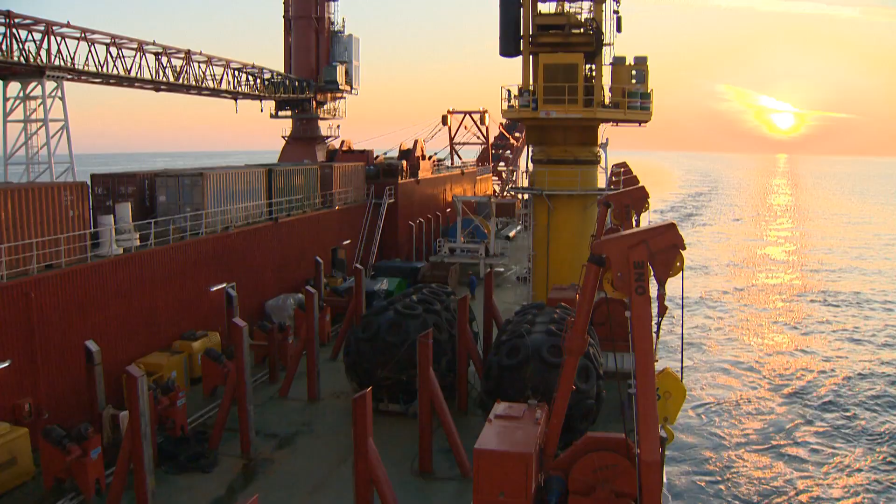The Dzhubga, Lazarevskoye and Sochi gas pipeline is part of an intensive development program for all the Russian resorts on the Caucasian Black Sea region, and is included in the program approved by the government of the Russian Federation for construction of the Olympic facilities and the development of the mountain resort of Sochi. The Russian company Gazprom is the beneficiary of the gas transportation pipeline.

This is a project that consists of 150 kilometers of pipeline, and it goes from a town called Dzhubga down to Tuapse, and from Tuapse down to Kudepsta, which is close to Sochi, where the Olympic Games will be held in the year 2014. One of the most important things for this gas pipeline is the distribution of the gas, so the infrastructure in the country can be improved and they can prepare for the Olympic Games.

With a total length of 177 kilometres, out of which an offshore section of 159.5 kilometres, the DLS gas pipeline is installed on the seabed, along the shoreline at a distance of approximately 4.5 kilometres, having its final point of termination at the gas distribution facility in Kudepsta, in the vicinity of Sochi. GSP is the only Romanian company to win a project of such a scale in the Russian Federation. The initial value of the contract amounted to $269 million.

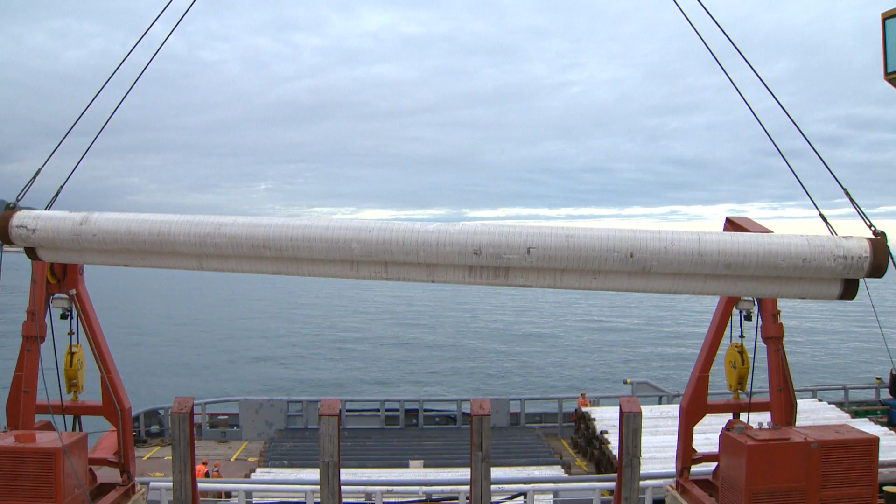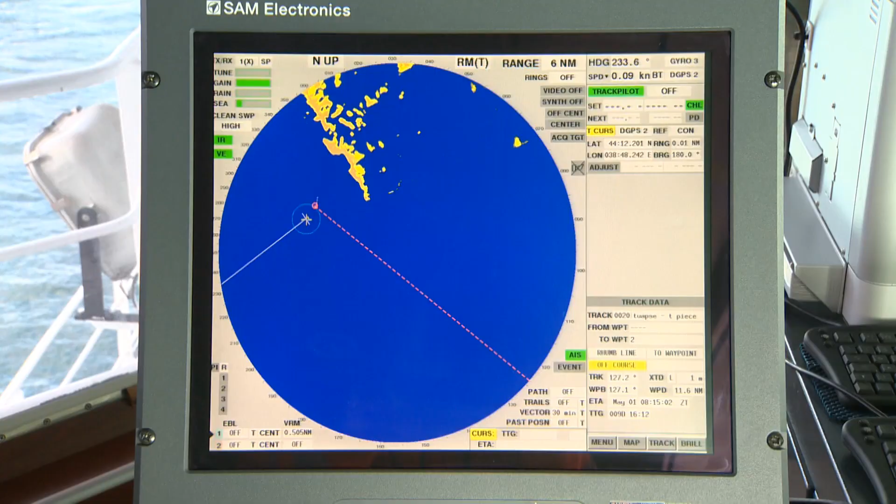The 530mm gas pipeline will have an annual flow capacity of 3.8 billion cubic metres. The offshore natural gas pipeline project was designed in such a way that it should be as distant from the coastline as possible, in order to guarantee the substantial mitigation of the environmental impact on the Black Sea coast ecosystem.

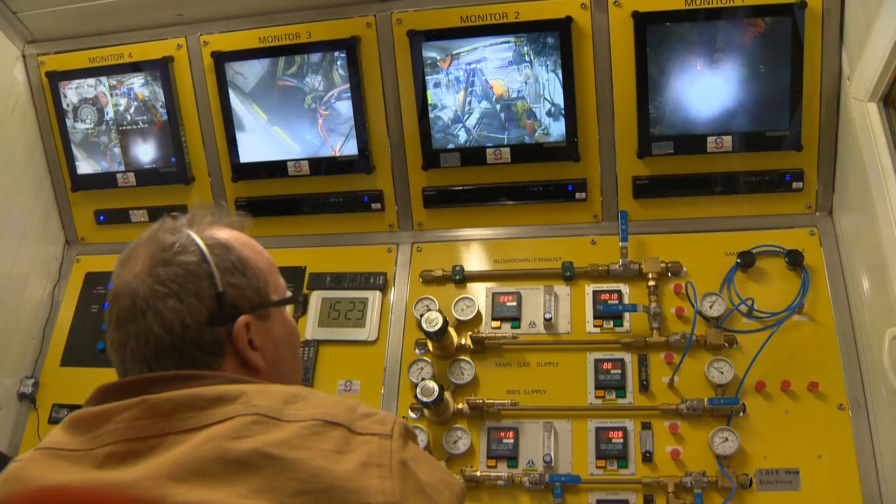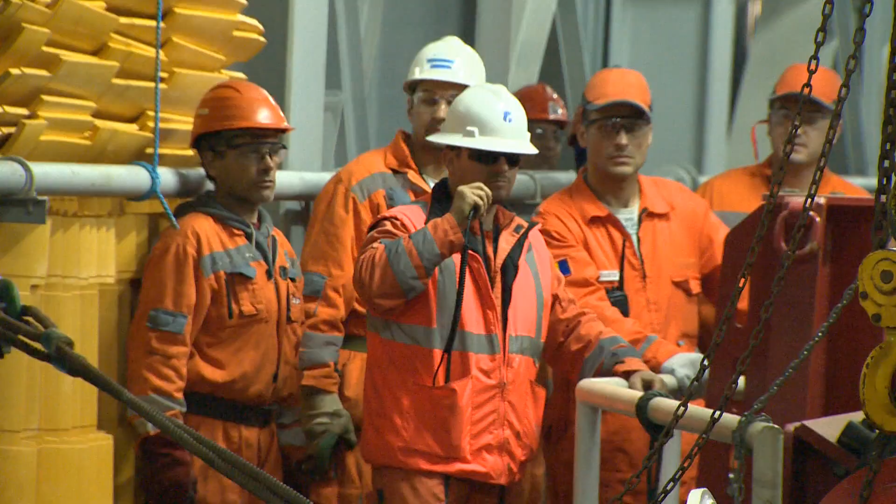DLS is a multicultural project comprising people of various religions and ethnic groups, as well as an extensive professional range, from fitters and welders to NDT technicians, ROV operators, divers and diving support operators, marine crews, designers of pipelines, oil and gas installation and commissioning engineers. A great variety altogether. A great number of nationalities have come together in this project to bring their engineering expertise. Romanians, Russians, Dutch, British, Thais, Malaysians, Italians, Spanish and many more.

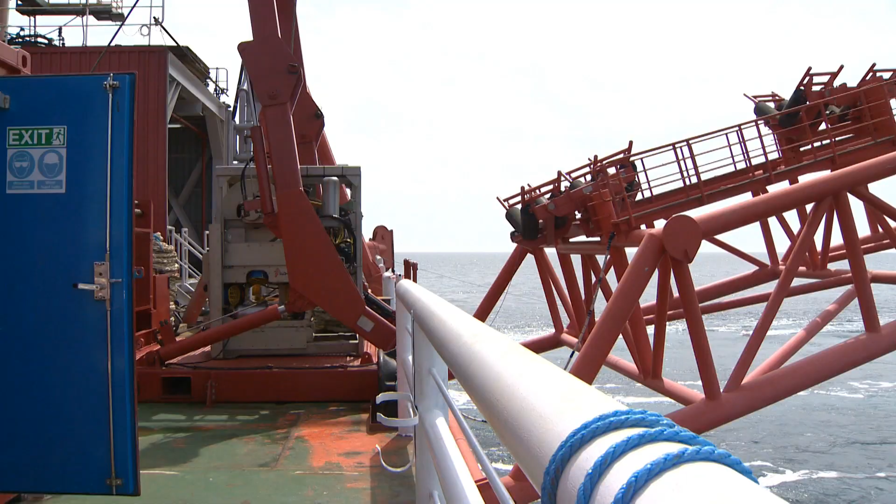The construction of offshore projects was under GSP's coordination. GSP carried out the main offshore works in approximately 100 days between March and July 2010. GSP has experience of large-scale projects and projects of outstanding importance. DLS wasn't in any way a simple project. I consider that this company is a leader in this part of Europe, especially in the Black Sea, regarding the drilling industry and the pipeline. Our job, the Bigfoot One job, is to lay pipe in Sochi.

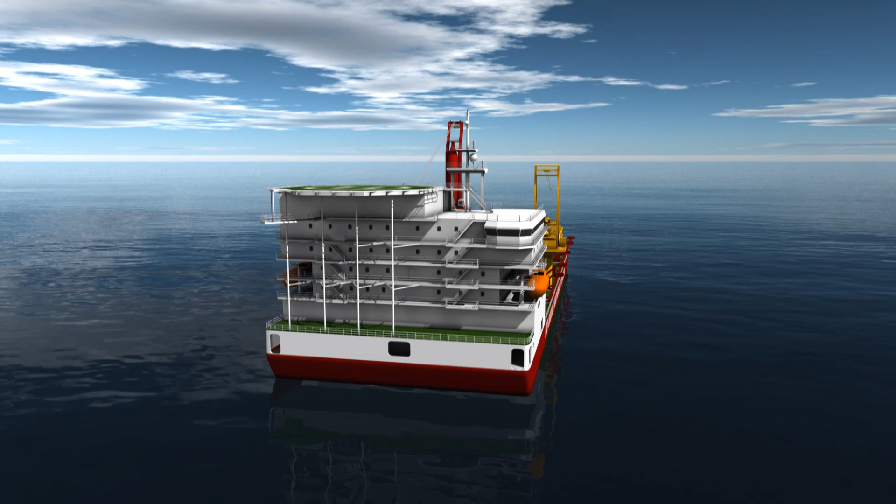The last 5% of the project works were completed in May 2011. Once the connection of the offshore and onshore sections of the DLS pipelines were completed, GSP Bigfoot One performed the final midline tie-in, welding together two sections of pipeline near the Kudepsta settlement. Previously, similar works were performed near Tuapse, Dzhubga and Novomikhailovsky.

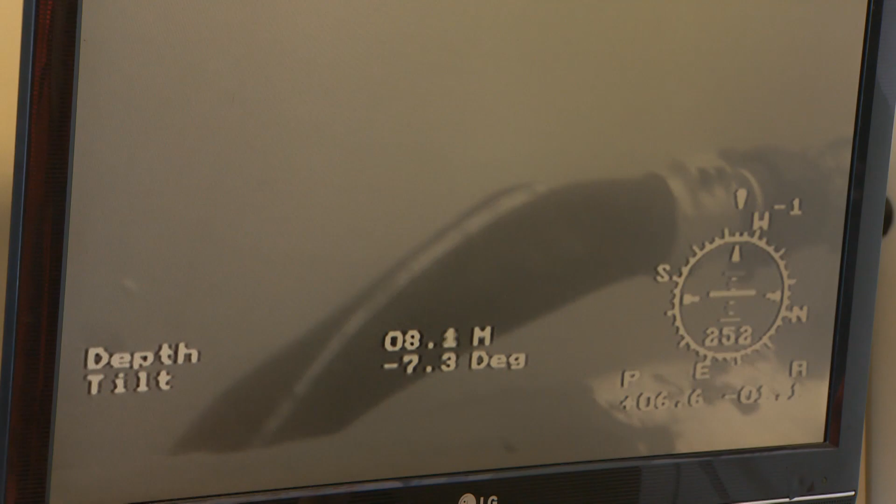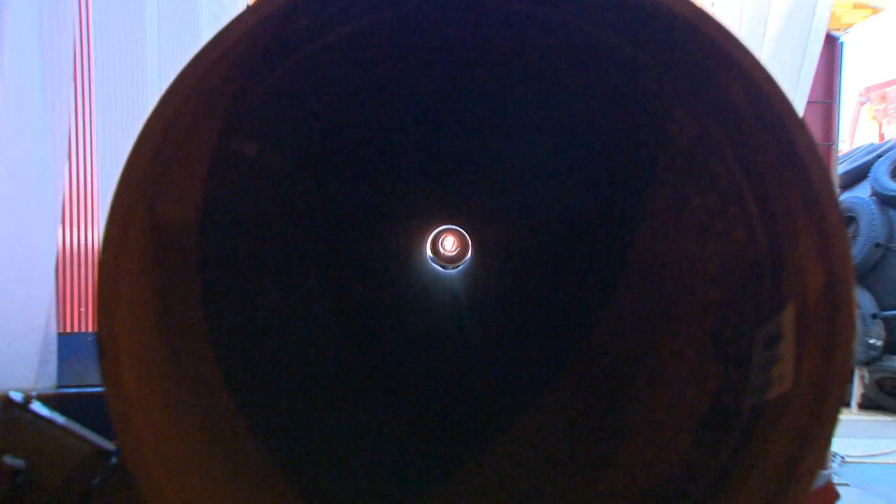The onshore-offshore connection of the DLS pipeline, Southern Loop, was then followed by pressure testing, dewatering and drying. The testing and drying of the Northern Loop in the Dzhubga-Tuapse section had already been completed. You may become aware of the dimensions of the DLS project once you learn about the offshore section, which weighs 84,000 tonnes.

GSP's offshore technological camp was quite something. An extensive international fleet mobilised offshore of the Caucasian shore at about 4.5 kilometres. Two pipeline barges, GSP Bigfoot One, built in 2010 in GSP Shipyard, and Seamaster. GSP Prince, the most modern OSCV and DSV ROV in the Black Sea, built in 2009 in Norway. GSP Phoenix, PSV, intended for manpower and materials delivery.

GSP Vega and GSP Queen, the anchor handling tugs. A 12-man, 300 metres of saltwater saturation diving system. A fleet of ROVs for pipeline route surveys, as-laid surveys, monitoring of trenching and divers operation and subsea installation works.

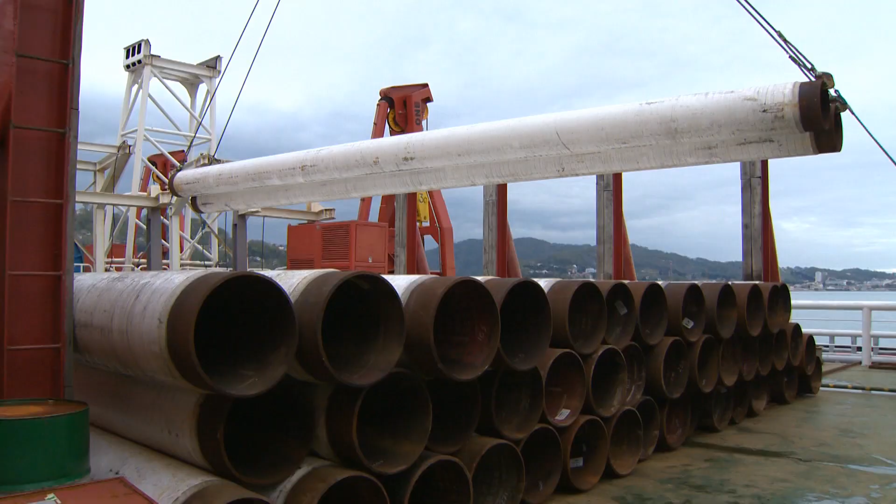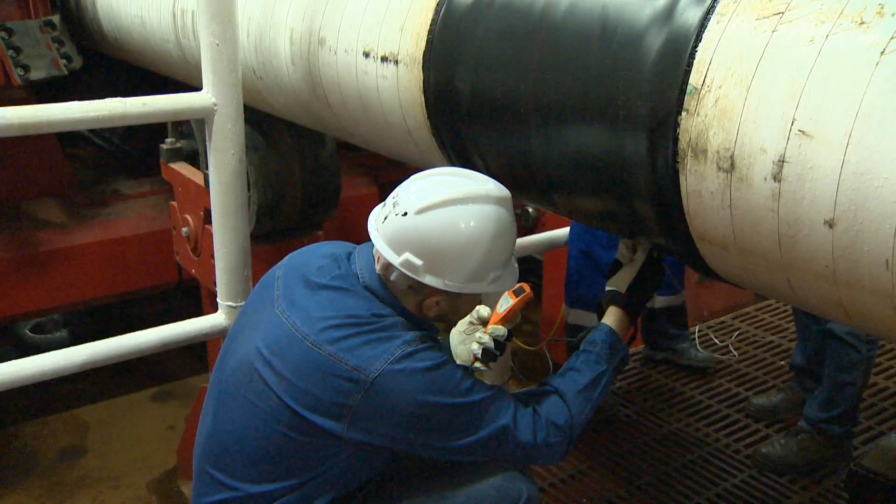The gas pipeline fabrication process consists of several stages. The pipe laying barges ensure the entire pipeline fabrication and technological processes. Beveling, automated welding, non-destructive testing, coating testing, and finally the pipeline launching out of the stinger to the bottom of the sea. The pipes are transferred from the storage area with the help of a special pipe conveyor system, beveled and immediately after that automatically welded.

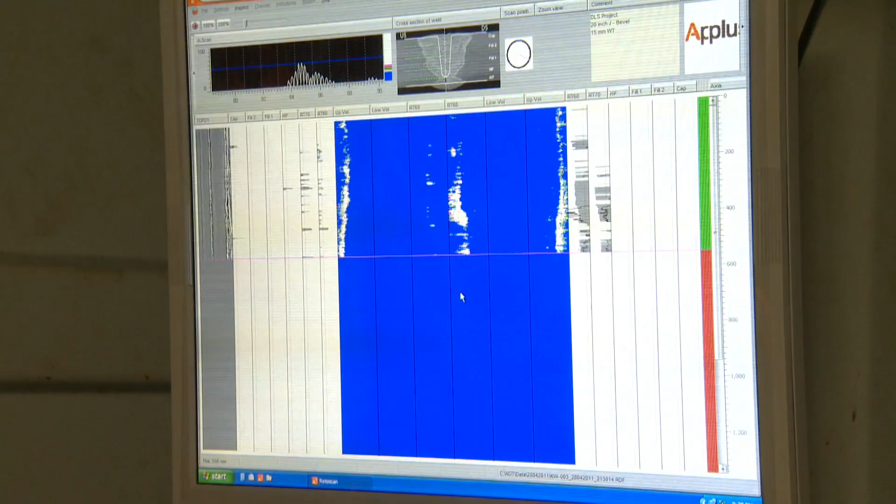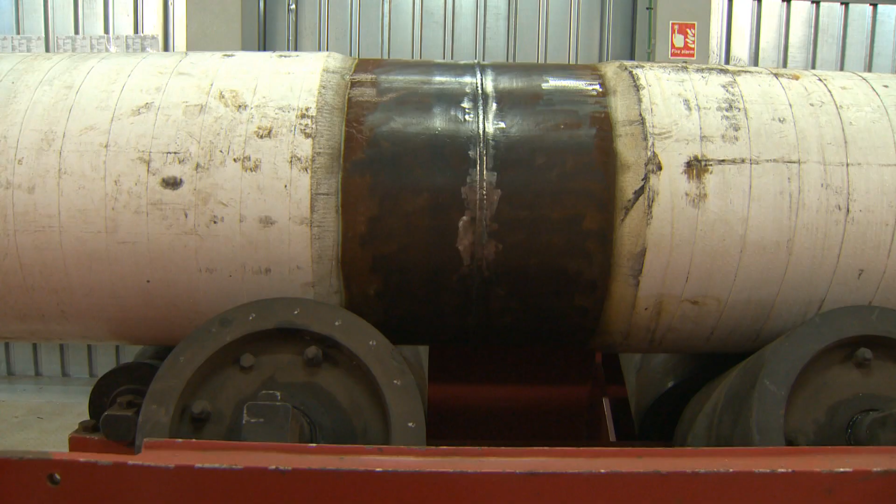Once examined for flaws or defects at the NDT station, a welded joint is treated in a special way to ensure protection from leaks or mechanical damages. All these operations are performed on the firing line. After that, the pipe is launched onto the seabed using the stinger.

The entire process lasts approximately 8.5 minutes. Thus, every 8.5 minutes, the gas pipeline gets 12.2 metres longer. While the vessel moves at exactly the same speed, it is almost impossible to notice the vessel movement. The pipeline grows slowly, with approximately 2 kilometres per day.

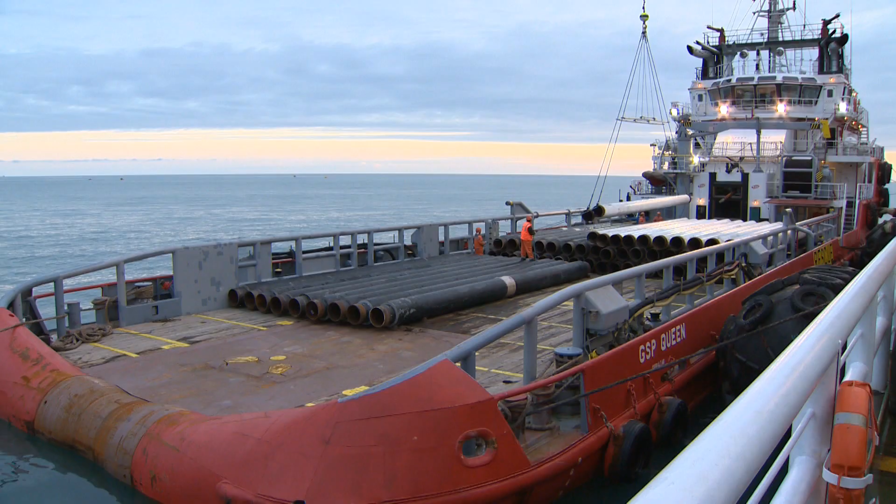Taking into consideration the offshore mobilisation works, words like slowly have a new meaning. Technologically speaking, a 2-kilometre pipeline installed daily in normal weather conditions is quite something. The onboard pipe supply for the firing line fabrication process is stored on the main deck, neatly stacked in lines occupying up to dozens of square metres.

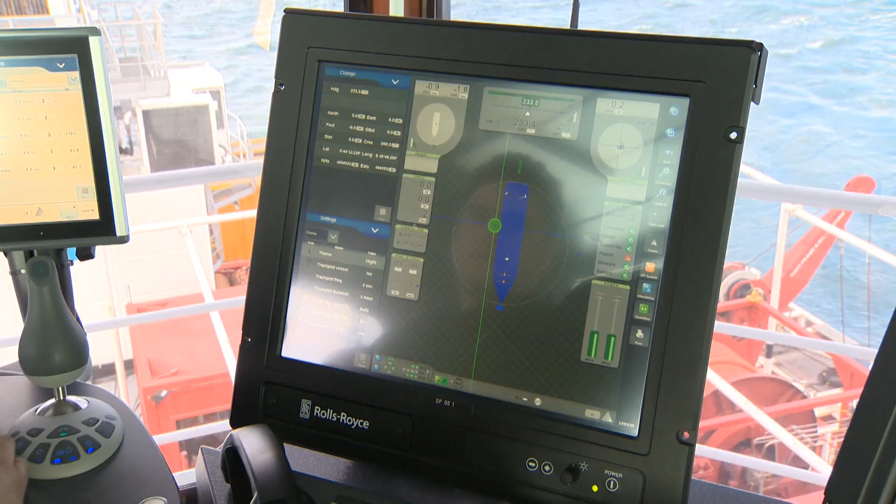GSP Prince looks impressive, and we can assure you it is. It is the most modern OSCV, DSV and ROV from the Black Sea. It was built in 2009 in Norway. The vessel can operate in extreme weather conditions.

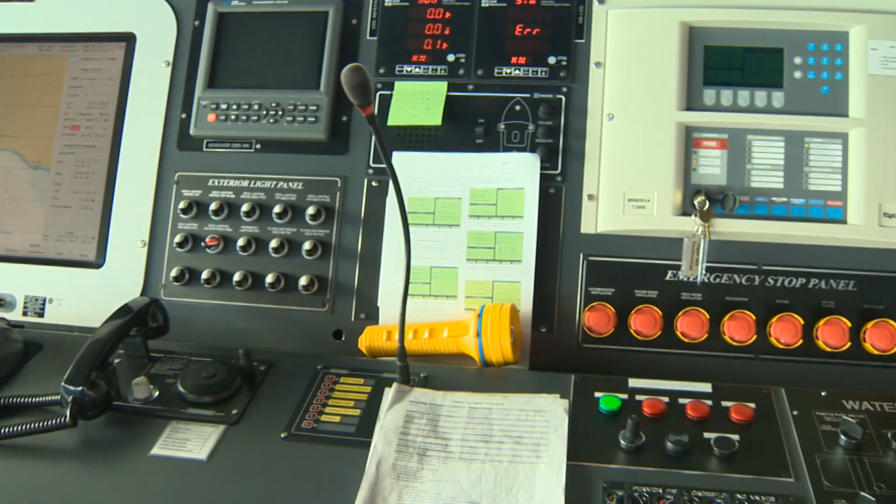It can perform tasks such as underwater inspection of cables, routes and pipelines with ROVs, seabed mapping, subsea installation works, diving operation support, geotechnical studies and manned and unmanned subsea vehicles, support surveys, inspections and investigations. GSP Prince was the main ROV and DSV support vessel in this project.

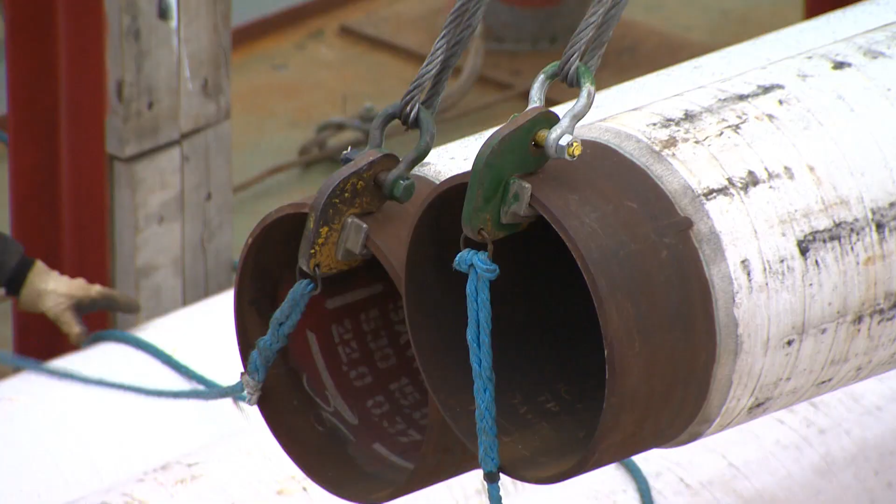In order to lay down pipes, you need a pipe supply, and the pipes are stacked on the deck. The standard dimension of the pipe is 12.2 metres, and at this diameter they weigh 6.4 tonnes each, including the cement coating which ensures the negative buoyancy of the pipeline.

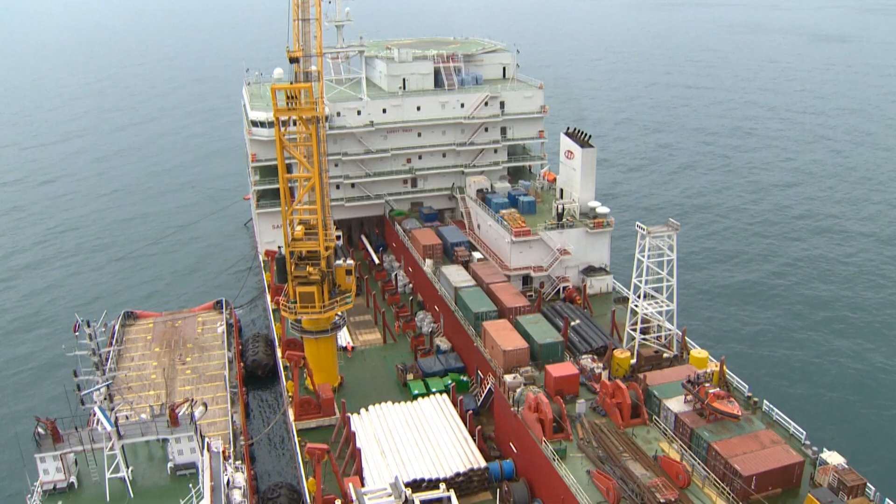All the pipes are manufactured at the Vyksa Steel Works and coated with concrete at the Moscow Experimental Pipe Procurement Plant. They are brought onto deck and stacked in zero bay by the joint handling NOV crane. The pipe joints are stacked in special racks and the same crane moves them onto the production line.

The first operation is a quality inspection. The purpose of this operation is to inspect the entire surface of the 12.2 metre long pipe in order to discover any fabrication flaws or deformities caused by handling.

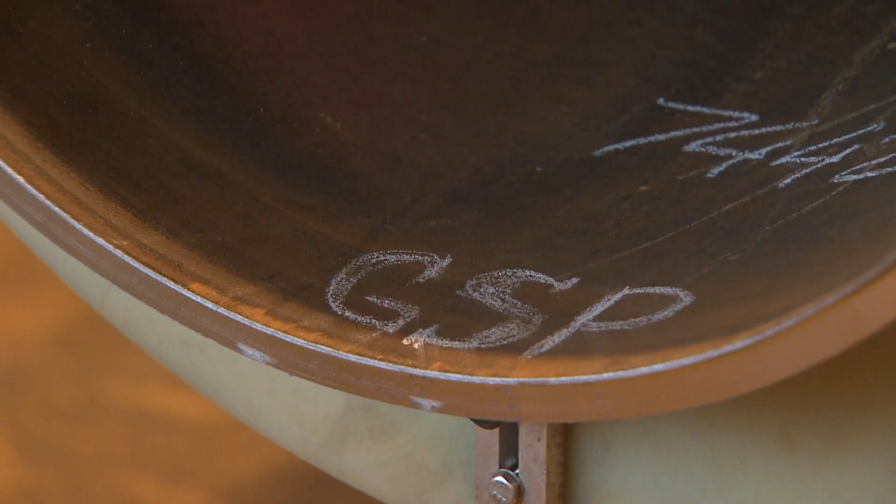Despite the impressive size of the pieces, small irregularities may look unimportant, but due to the harsh environmental conditions at the bottom of the sea, any small problem may evolve in time, generating complications. This is why, at the QC station, the inspection is done thoroughly.

Pipelines are aligned and directed to the preparative workstation 1 for the J-type bevelling operation. Here the bevelling is performed with 2 hydraulic cutters simultaneously operating upon both free ends of the pipe. The picture is pretty simple here. The equipment you see is exactly what is needed in order to lay down the pipes.

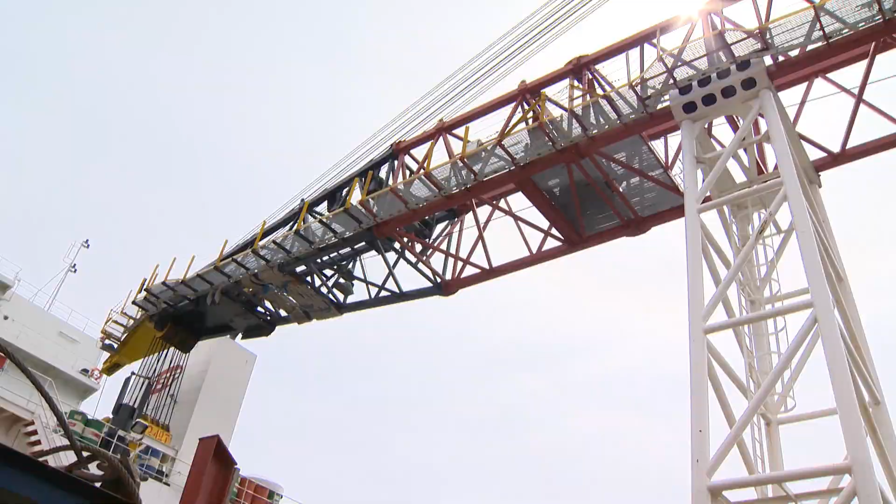A heavy lift crane, a Liebherr 318-ton lifting capacity, an NOV pipe handling crane, conveyor rollers, an S-lay stinger, and a brand new fully operational firing line and an army of perfectly trained operatives.

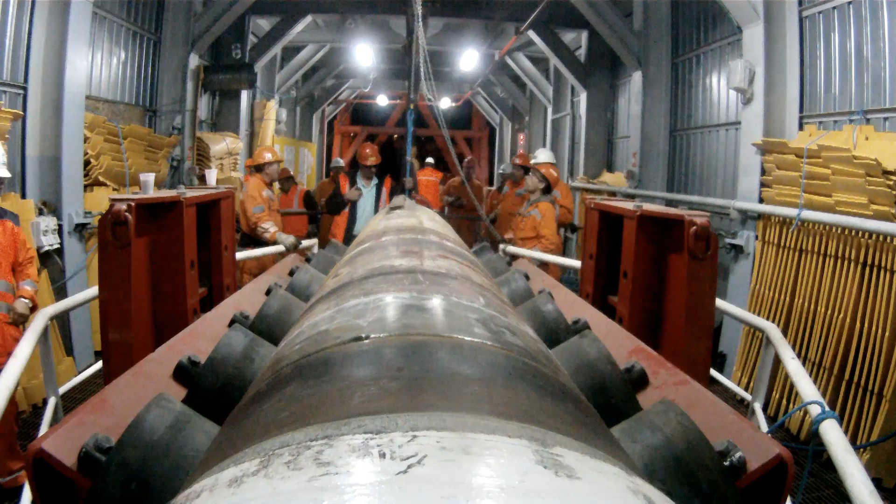This is the first pipe segment, and 6 working stations away it will be placed on the seabed. In this particular case, for reasons that will become clear later, the pipe section has a launching head at the start. This is designed to sustain the traction tension of the entire pipeline, ensuring its tightness in submersion, but we'll get back to this.

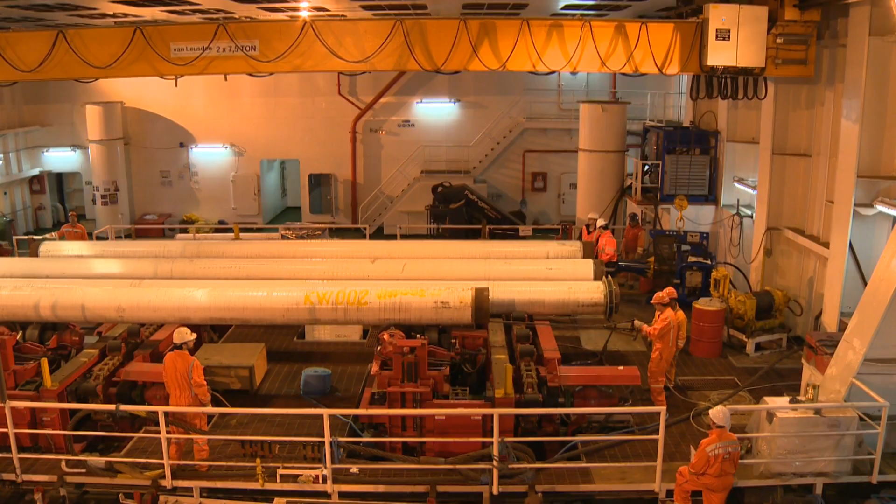The pipe sections are rolled on the firing line or the fabrication line. The most important operation, welding. We have here 3 welding stations, 3 complete welding stations. The first one is the most difficult because we need to adjust the pipe, make the line up, put together, and then we weld 2 passes, the root pass and hot pass.

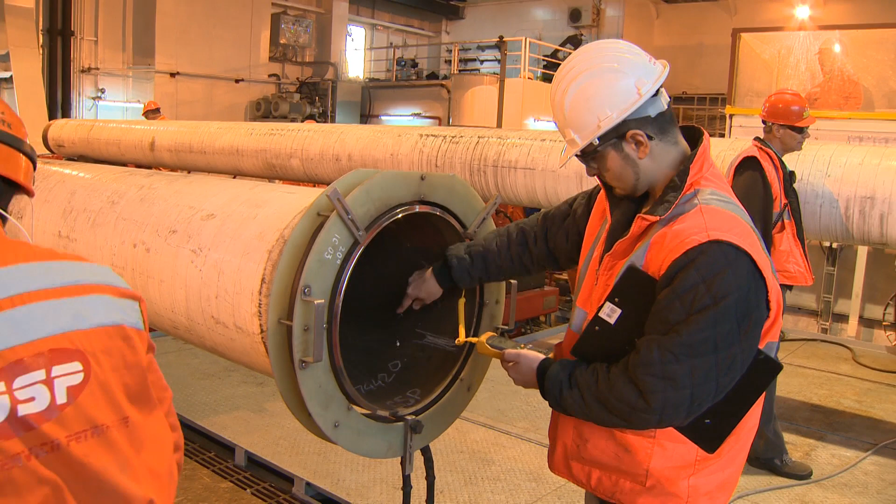When we finish, we press the green light, and if all the stations are in green color, the pipe moves to the next station. Then the pipe arrives at station 2, and in station 2 they weld another 2 passes. In order to ensure the welding quality, they preheat the pipe to 150 degrees centigrade using an induction coil. After its completion, the pipe sections enter the fabrication process.

The correct welding operation has a number of compulsory stages. The pipe sections are aligned with support of the pneumatic device, which ensures all of the dimensions and alignment requests are observed according to procedures. A complete joint includes 5 welding rings or passes as follows. The first one is called the root, and then comes the hot pass.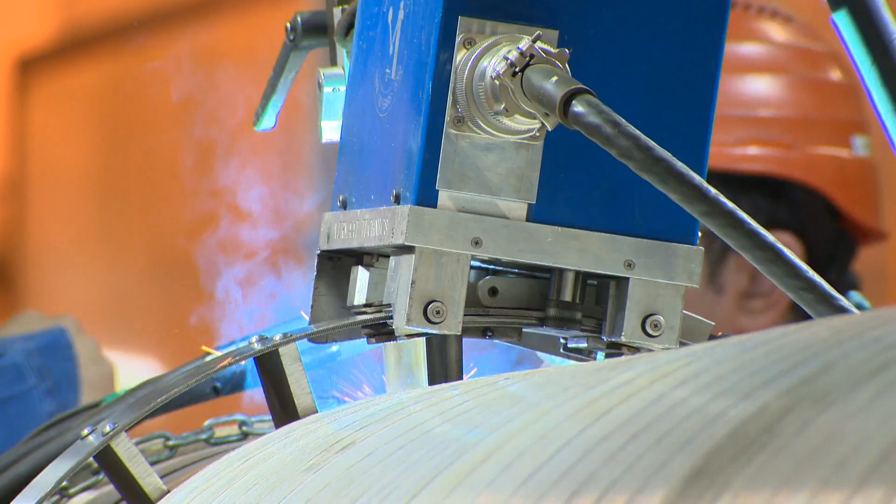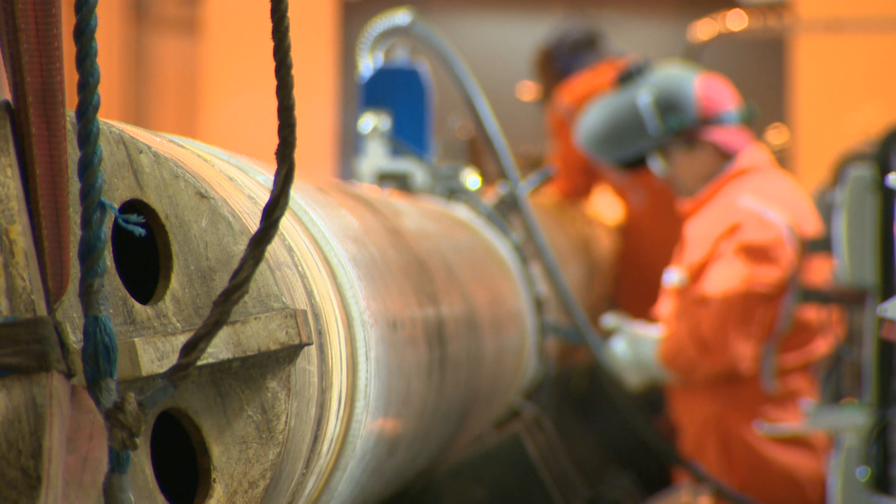Afterwards, fill 1 and fill 2, and the last, the cap. Referring strictly to the pipelay operations performed at Kapidağ... the above mentioned stages were performed in the following sequence. Welding station 1, root and hot pass. Welding station 2, fill 1 and 2. And still going exactly as the welding chief said, to station 3, where they applied the last welding ring, the 5th.

No matter how thorough the job is done at the welding stations, there is always a risk taken into account. This is why the pipe goes to workstation 4, where a non-destructive ultrasonic testing is performed. The QC team inspect the welding for gas bubbles, lack of penetration, lack of fusion, porosity or cracks, for example.

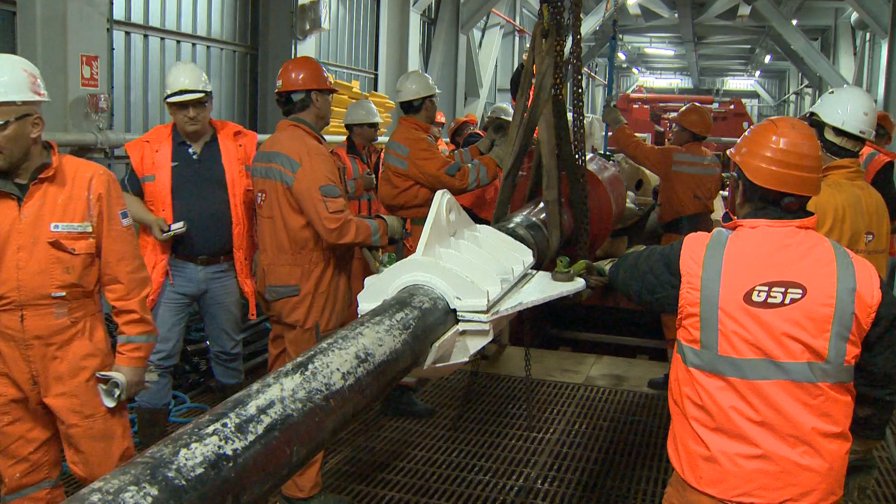We start with checking all the pipes inside the firing line, and we check the dimensional, check pipe numbers and bevel on both sides. After this, we supervise all the activity on 3 stations, welding stations, along the firing line, and when we finish all these activities, we supervise the coating activities on the stern of the barge vessel.

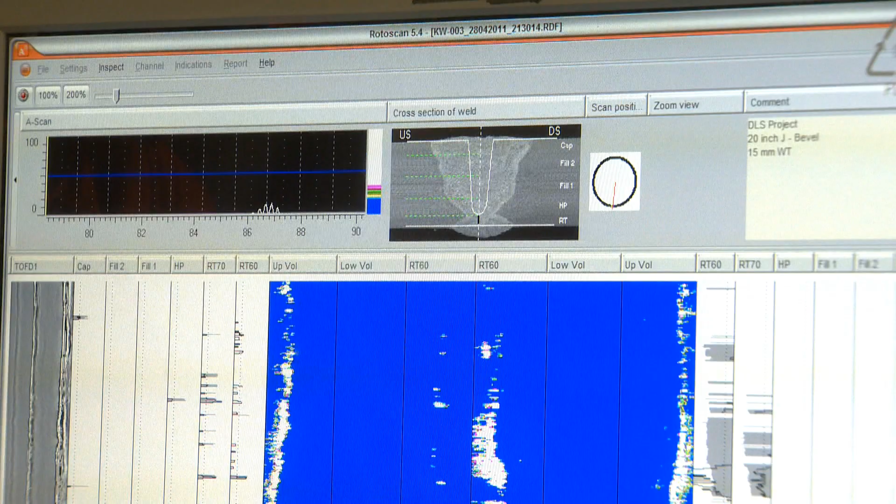Nothing escapes the automatic ultrasonic testing equipment, and the data is analysed and saved. In this case, as hoped for, there is not even a minor quality issue with the welding being checked. And speaking of the QC, there's not a single point in the entire process where they are not present and involved.

Welcome to the 5th station. Here they perform the cleaning operation. The welding is cleaned as well as its neighbouring area and the protective layer of pipe. Here at workstation 5, the welded section of pipe is prepared for the application of anti-corrosive protective layer.

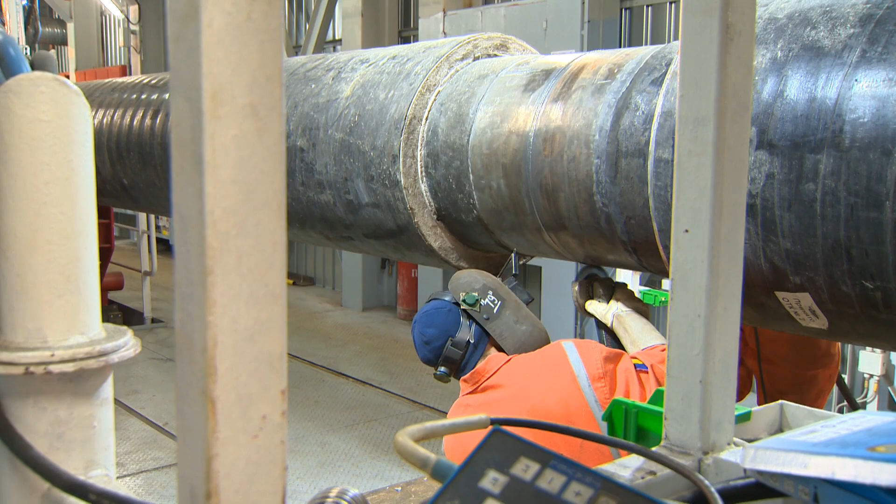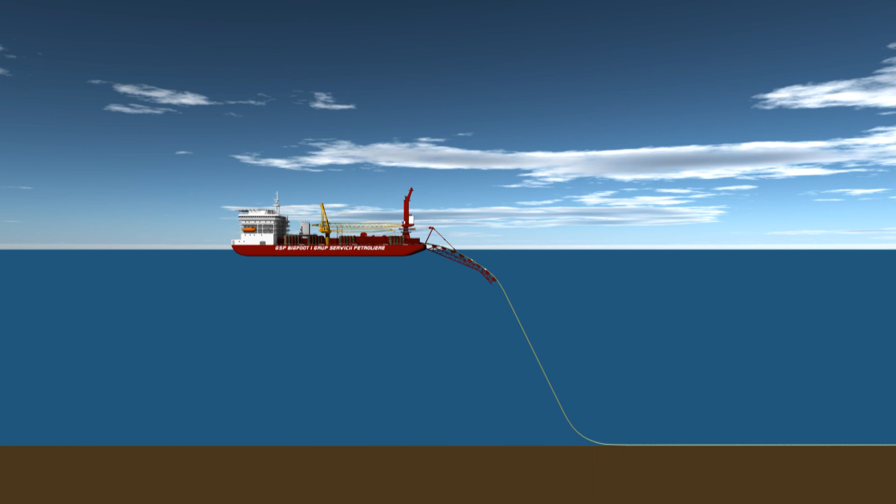From this point forward, what we call the pipeline arrives at the tension area. The tensioners are highly important for the pipe laying process as they are controlling the pipe launching from the barge into the water. Here the curvature radius of the pipe is monitored from the moment the pipeline leaves the last roller of the stinger, as well as the curvature radius of the pipe at the seabed contact point on the predetermined pipeline route. By contrast with other places and processes where speed is the most important factor, here the clamping and launching tension matters most.

And just how strong do you think the tensioners are? 80 metric tons each, that's how strong. 2 train locomotives on each side could not hold the pipeline as well as the tensioners do here.

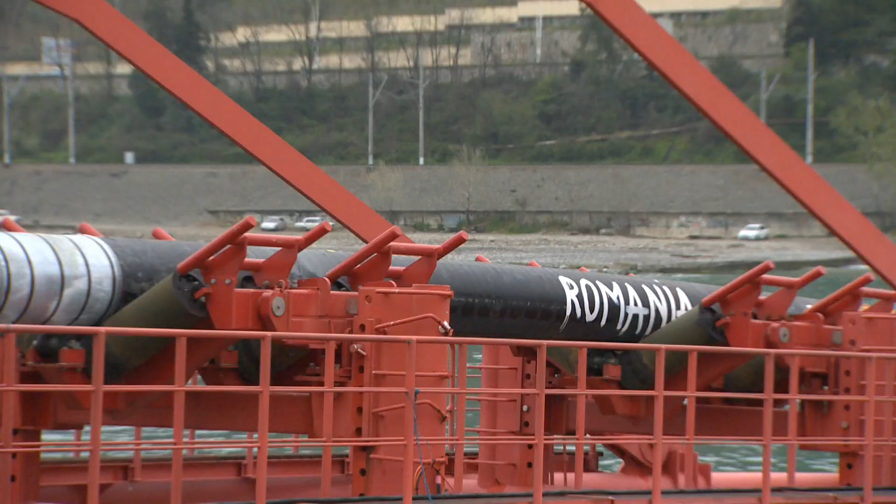Let's return to the firing line. We're here at workstation number 6. Here, in the process of protecting the welding, an extremely important element is added, the heat shrink sleeve. The easiest and most effective way to do it?

With a gas lamp. The heat shrink is applied over the uncovered area of the previously cleaned metal surfaces exposed to the welding process. The sleeve has the necessary width to cover the unprotected area. Being heat sensitive, it shrinks over the design area under the gas flame exposure, leaving behind a perfect field joint coating resistant to corrosion in time.

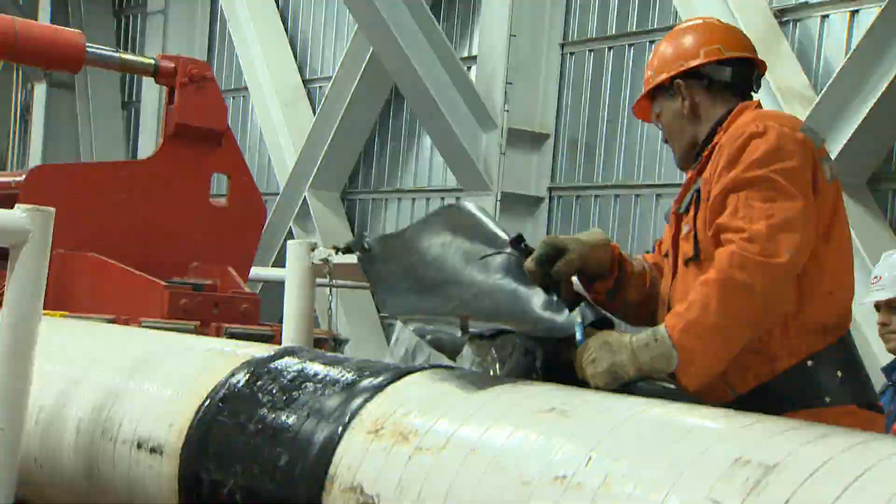It is obviously a little bit crowded at workstation 6, but there are 2 more operations carried out here. Firstly, the pipe that goes into the mounting casing is wrapped in stakes, or as everyone calls them, crocodile tails. This is for obvious reasons. And secondly, for the concrete coated pipe, due to the fact that the cement field joint coating is thick, the protection area had to have the same thickness. This is done with foam injection.

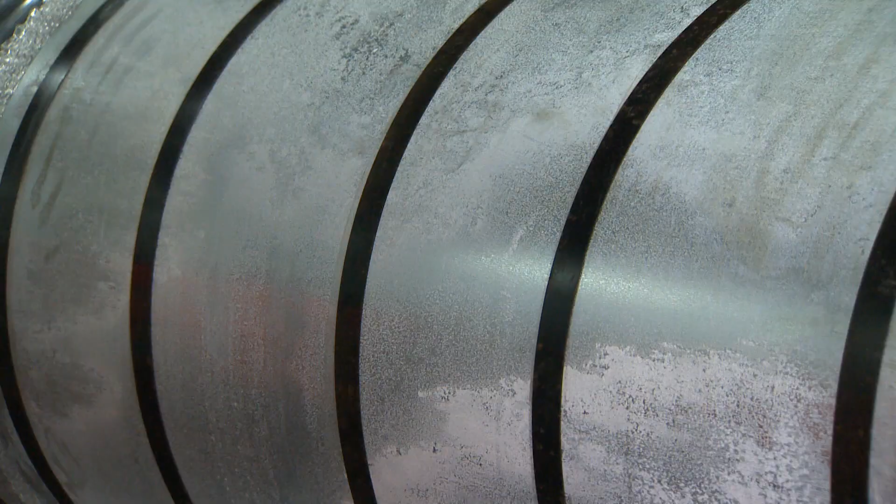Step 1. They cover the area with a metal sheet. Step 2. Final fixing of the metal sheet. Step 3. A little more predictable. They inject the foam. Now let's stop for a minute and see what this is all for.

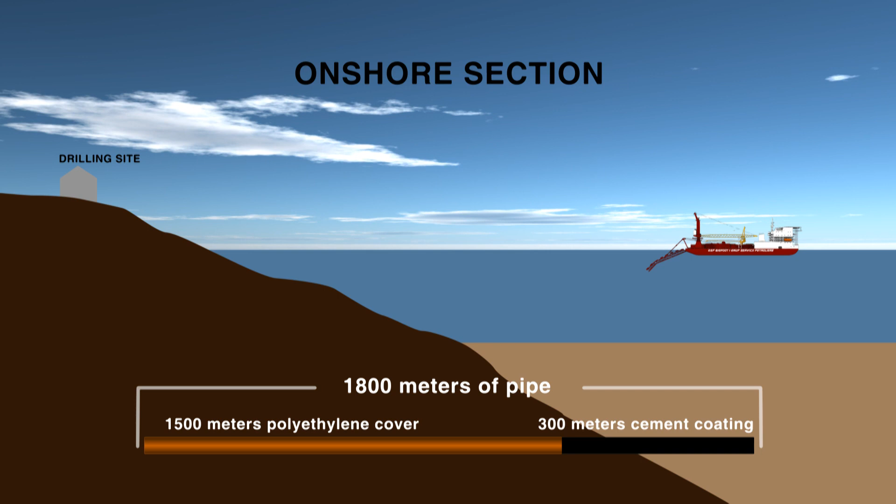An onshore approach section. So a total of 1,800 metres of pipe. 1,500 metres have a polyethylene protective cover. 300 metres have a plus of cement coating. Out of this 1,800 metres, 1,500 metres are pulled through the casing that awaits already on the coastline. From the shore site end, a drill string is sent down. Slowly it goes out from the underwater casing, being pulled along by GSP Bigfoot 1.

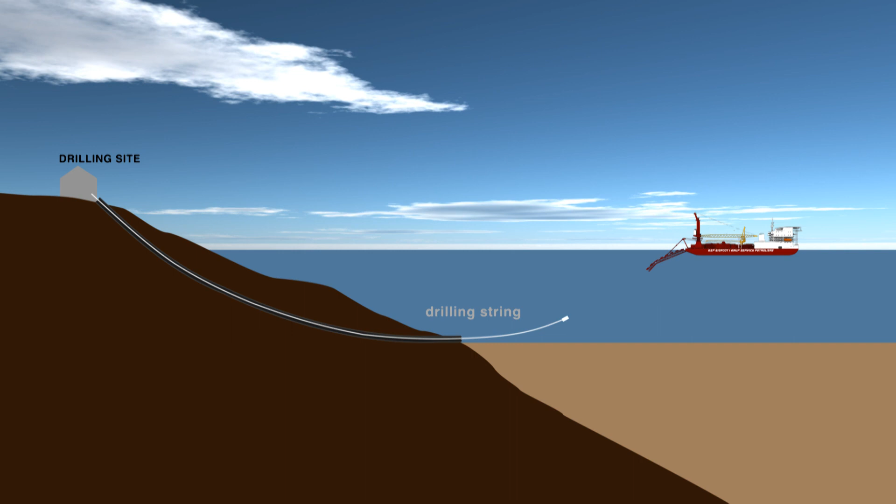Remember the launching head? Now we go back to it, because it's time for action. The drilling string is attached to the launching head, and again, slowly, very slowly, 1,800 metres of pipe go back through the directionally drilled casing and up into the mounting. Simple as that. Actually it is, but only because thousands of incredibly beautiful minds previously worked their brains out till this process is just right. Impressive.

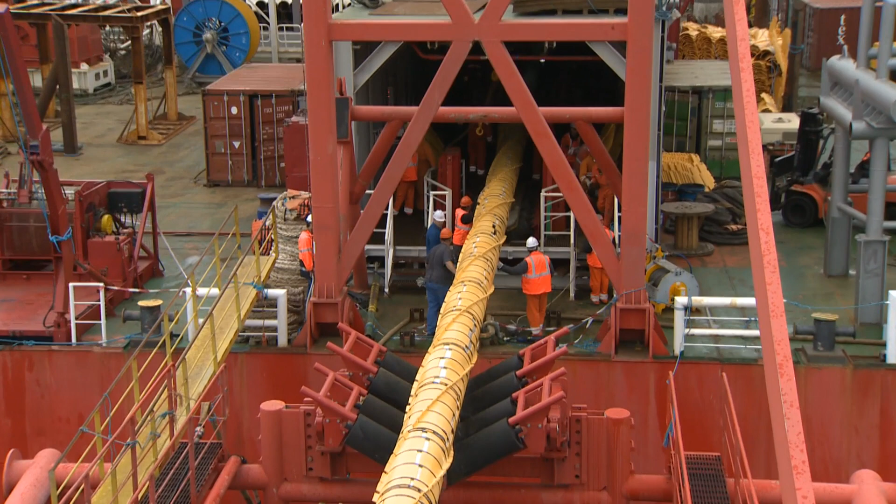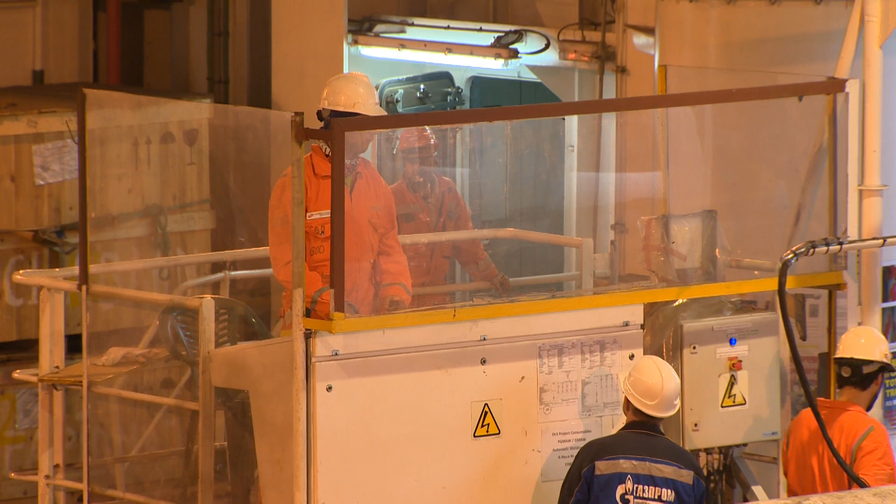Once the pipeline leaves workstation 6, it is ready to get into the water, but not until getting the OK. Each workstation is endowed with a control panel with ready and work in progress commands. While one of the red lights is on, it means that somewhere on the firing line someone is still working. Depending on the works being performed at the time, the station operator enables or disables the station status. Immediately all operations are completed, the green lights appear.

Of course, the launching of the pipeline into the water is performed according to a perfectly designed process, with the support of the stinger. It does not only sustain the pipeline, but also controls its curvature radius. The curvature radius is highly important. In fact, so important that this process doesn't have a name but two. The superior part of the S the pipeline designs into the water is called the overbend. The inferior curvature is the sag bend.

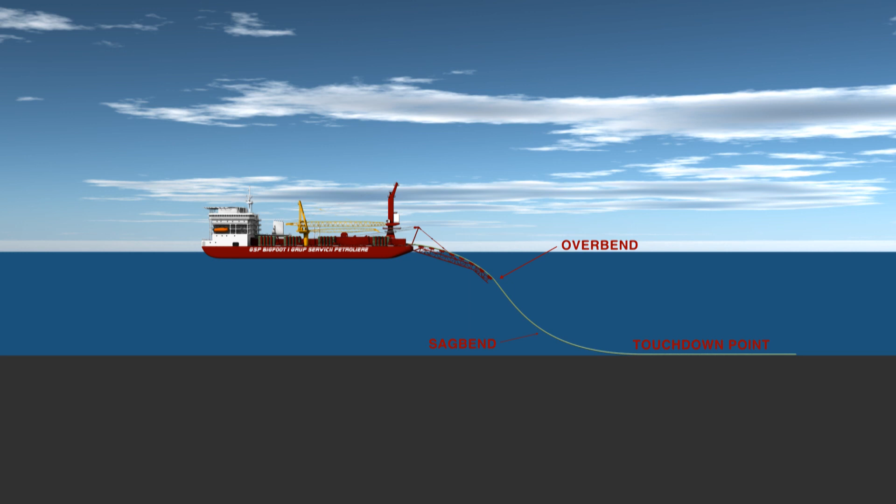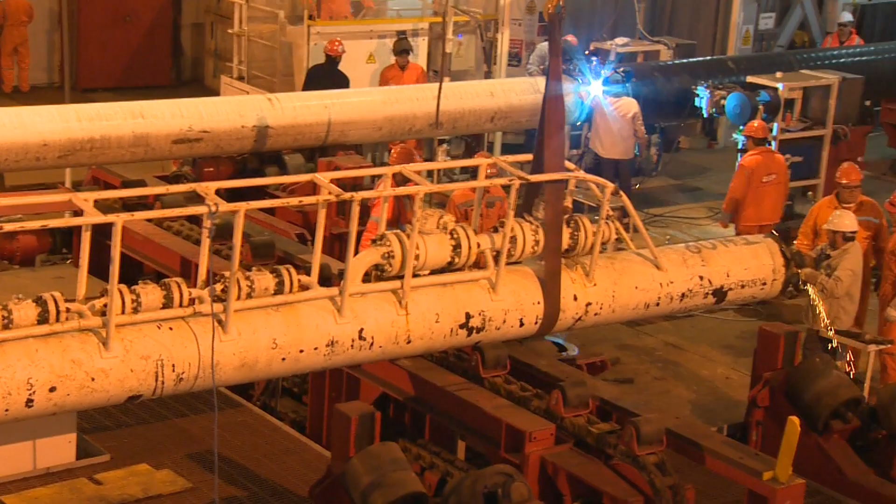So, they have just finished welding the last piece of pipe, but before they perform the connection between this one and the one already at the bottom of the sea, the preparative is made in order to test the pipeline. The pigs rush in. The pipeline internal gauges are basically big cylinders with the same diameter as the pipe. Using water pressure, the pig pushes the device throughout the entire length of the pipeline. And if everything is okay, they come out the other end in perfect shape. Actually, they did come out intact. But the workflow is not yet complete.

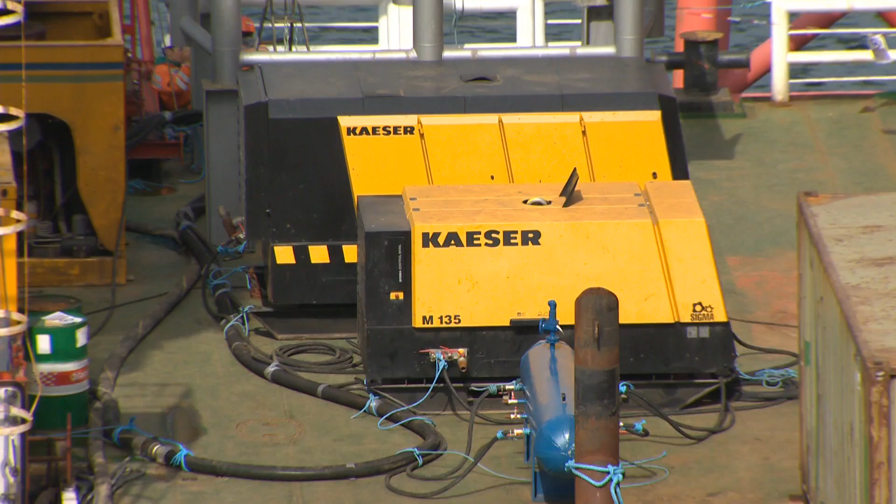For protection purposes, the pipe must be protected and buried in sand. For this, they use a jet air tool. In the final phase of the operation, the pipeline will be trenched from the casing exit to the tie-in area on a distance of 300 meters to a depth of 1.5 meters. This work will be performed by means of a jet sled machine.

Operating at high pressure, the machine will dislocate the soil, leaving behind a desired trench depth which will protect the pipeline in the future. They put this tool over the pipe. The water is pumped at 20 bars and the sand is displaced, and gravity does the rest and sand settles down over the pipe.

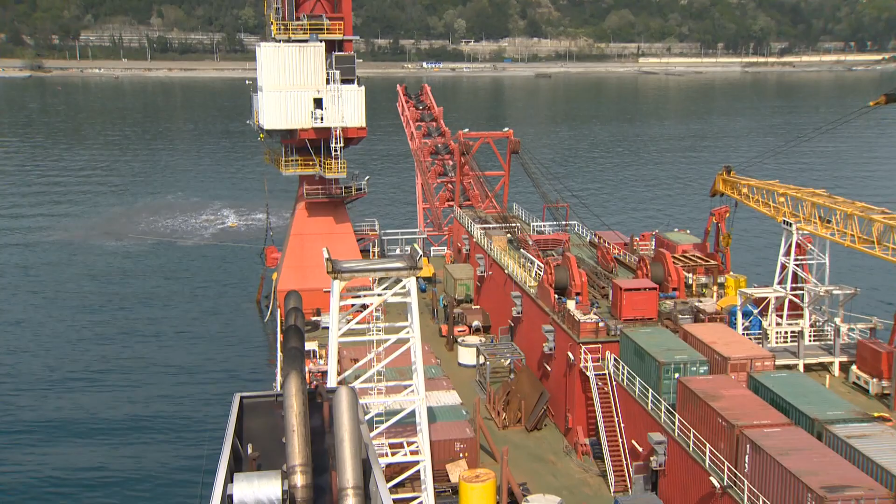Sure, now it is hard to see what otherwise is obvious in this big technological marine adventure. As the anchor foreman said, it seems chaotic. Well, maybe it might look like searching for a screw in the maze of pipes and anchors, but as the foreman added, it's highly controlled chaos. So in the end, it is all for a big purpose. Though it's not visible under a metre of sand, the pipe is extremely important for this developing area.

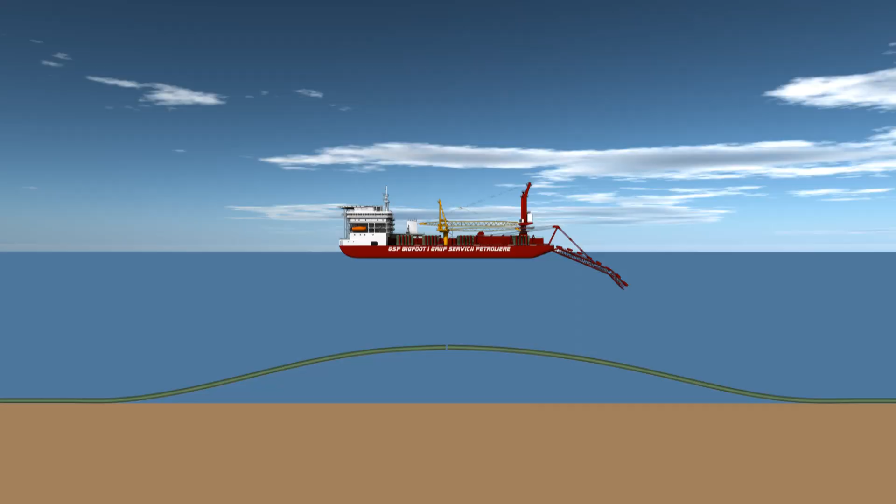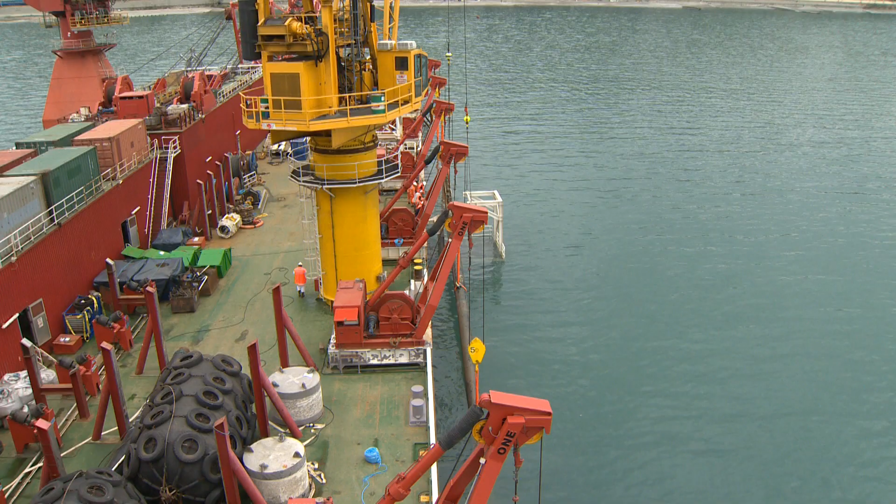We have a few loose ends now to try to clear up. How do they make a joint between two subsea pipelines? We have a name for this operation, midline tie-ins. Let's see how the offshore installation and welding engineers figured it out, or even better, how they do it on board GSP Bigfoot 1. Lifting of the pipeline end will be carried out using the 6 davits installed on foundations of Bigfoot 1. Davits will lift the pipeline ends above waterline in a safe manner so that welders can perform the tie-in weld.

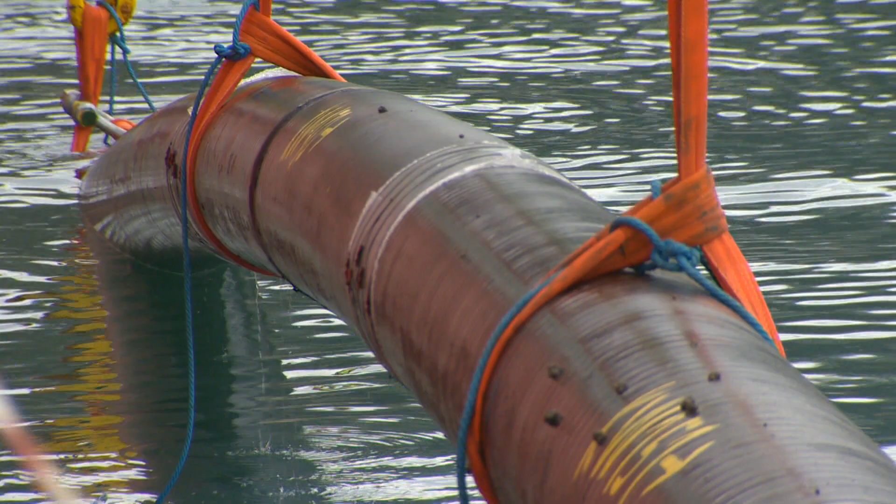6 davits are installed on the technical vessel. 3 of them hold the previously made pipeline section, the other 3 the newly made pipeline section. Both ends are held above the water at the deck level, one end facing the other. First they take off layer after layer of coating. Concrete and metal reinforcement structure, then polyethylene layer.

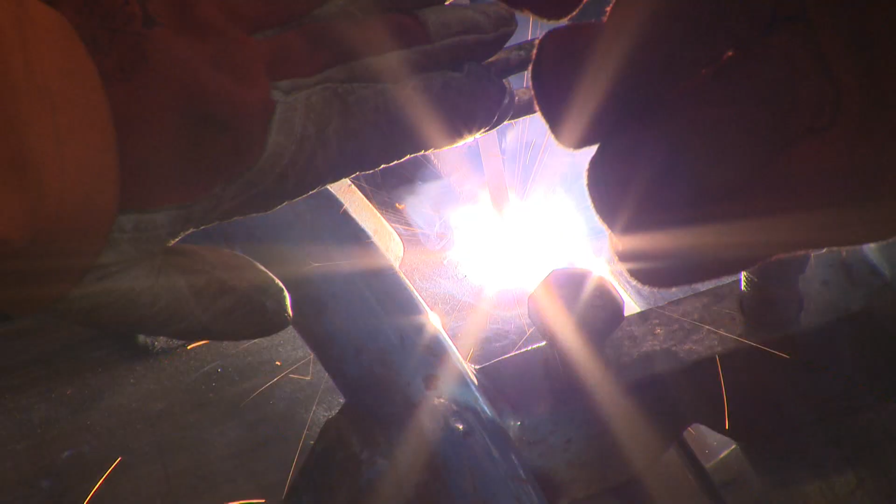Then, with the support of an external line-up clamp, they perform by hand one last weld. Be assured the handmade weld is as good as the automatic one. Those guys know their business. They have sealed pipelines all around the world. After the weld is complete, field joint coating is applied to protect the tie-in weld area.

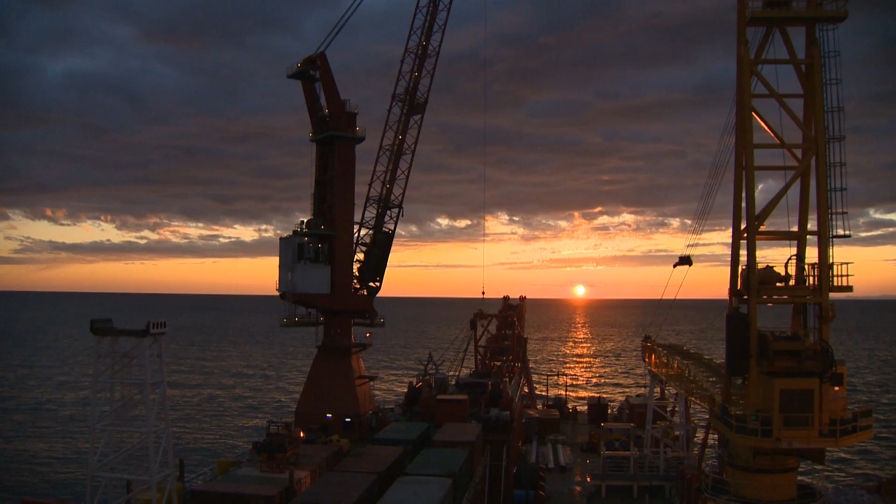There's another operation to be performed in order to consider the job ready. The pipeline has to be placed back on the seabed. In order to compensate for the loop made when the two pipeline ends are taken out of the sea, GSP Bigfoot 1 performs a side movement and lays the entire pipe on the bottom. This is one of the moments when the ROV enters the stage.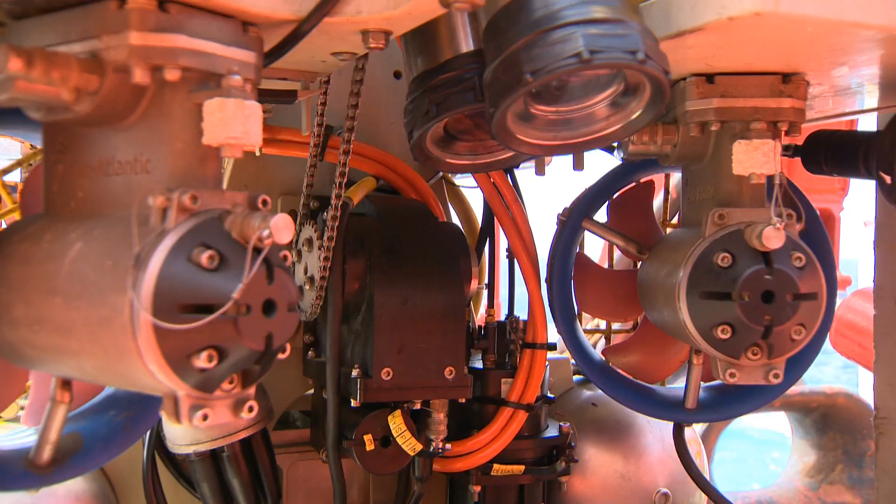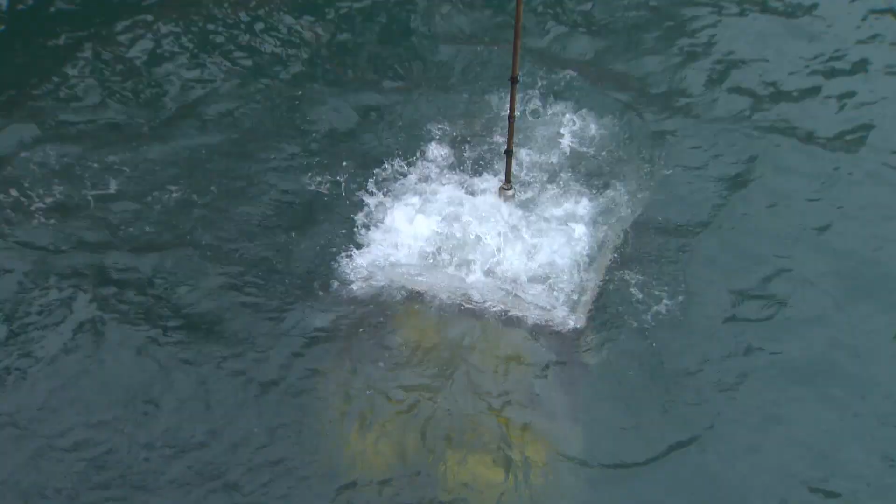This is Mohican. It's a light work-class inspection ROV and it has fitted a Hydro-Lek 5-function hydraulic manipulator, a SeaKing sonar, silicon intensified target black and white camera, a color zoom camera, able to operate at 2000 metres depth of seawater with 130 meters of working tether.

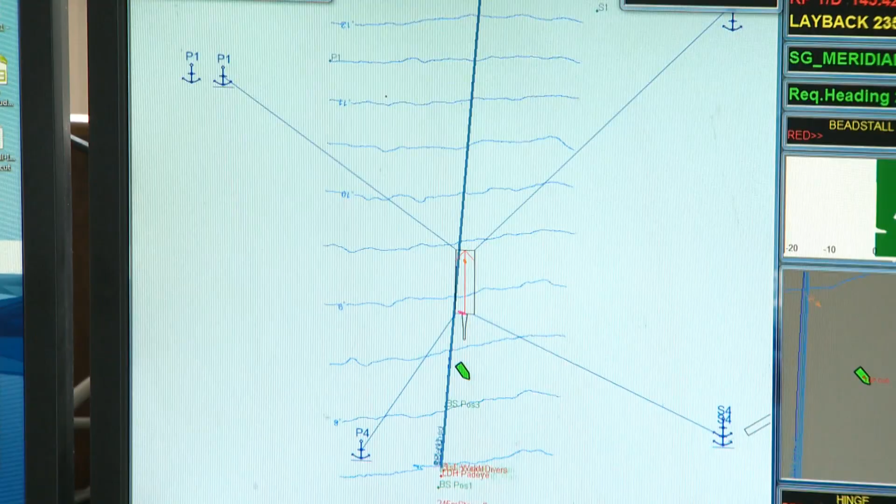Because of this subsea robotic vehicle, any problems that might appear after the pipe enters the sea could be instantly spotted and rapidly resolved. Throughout the process, the technical vessel must be highly stable. 8 winches control the pipe layer station, keeping it stable. Here's the place the 8 winches are controlled.

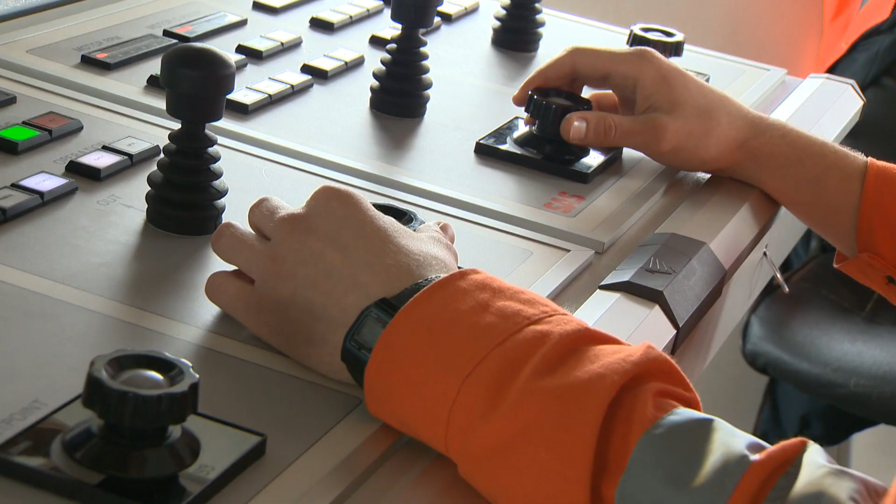This way, 8 thin tentacles with 8 anchors at the ends cling onto the bottom of the sea, with slow movements carefully calculated and verified by computerized survey systems, lead the barge the required direction. Each anchor winch has a tension capacity of 80 tons. Each anchor has a weight of 10 tons. For this kind of floating technological camp, you might take into account that it becomes compulsory to use some impressive pieces of technology to control it.

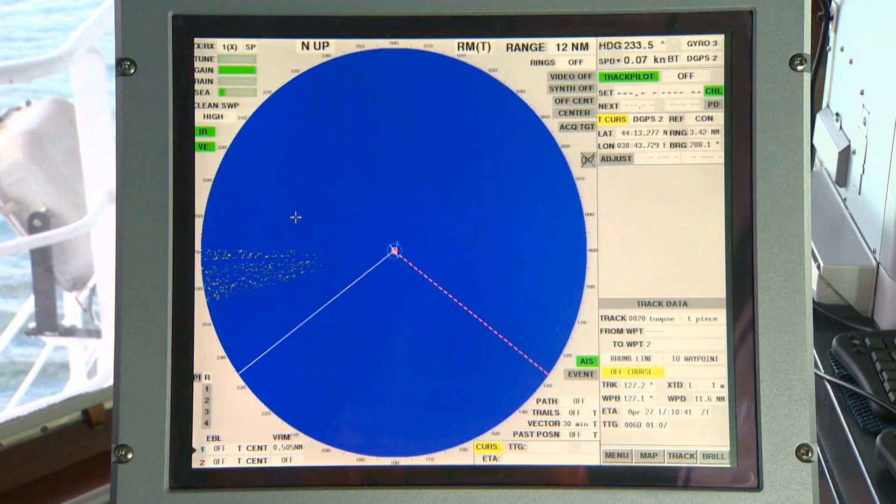Now let's have a look over the place where the pipe goes, the seabed. That place is not always a pipe-friendly place. For that you need a special ship. GSP Prince is an offshore support vessel, perfectly equipped for this kind of job. First it surveys the bottom, and well-trained men decide where the pipe should go. For that they use an impressive ROV, Triton XLR, and his little brother, Navajo.

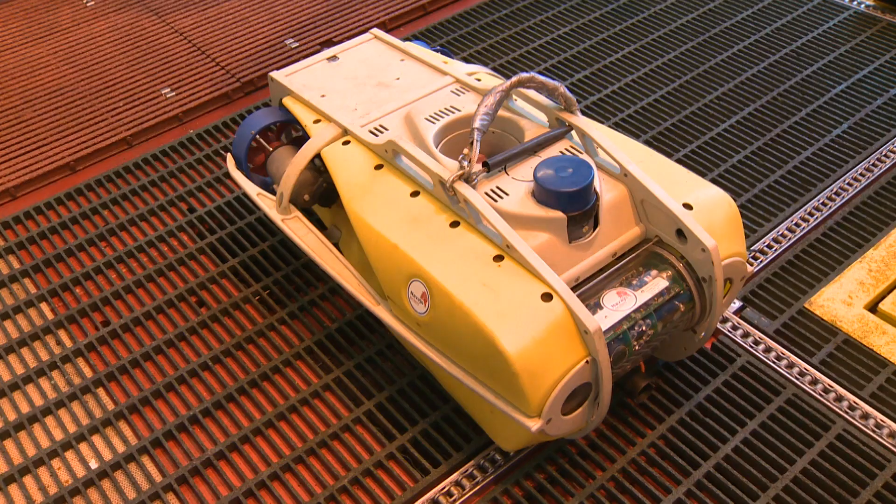The system is about 125 horsepower, roughly. It's got a 2,000 meter rating for depth. It's got 2 fully functional manipulators, one 7-function and one T4 manipulator. If the seabed is good to lay pipes, but not good enough, the divers team is called. Sometimes they actually have to excavate into the seabed so the pipes don't bend or fracture.

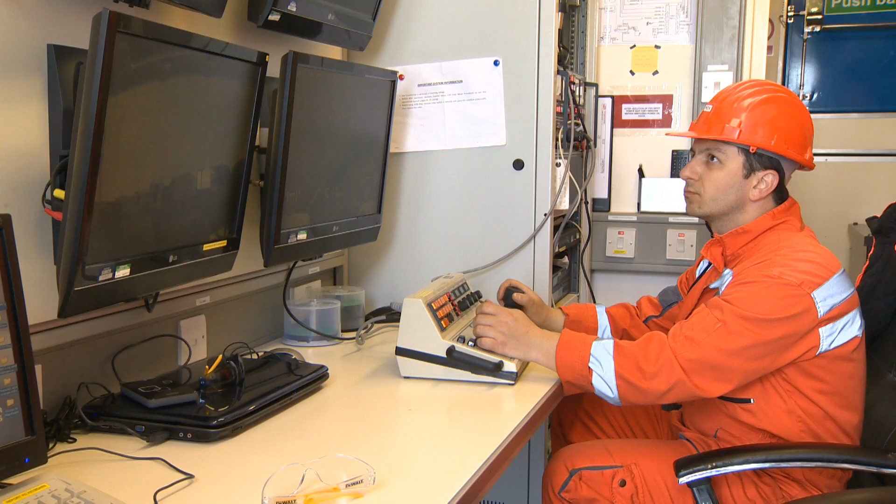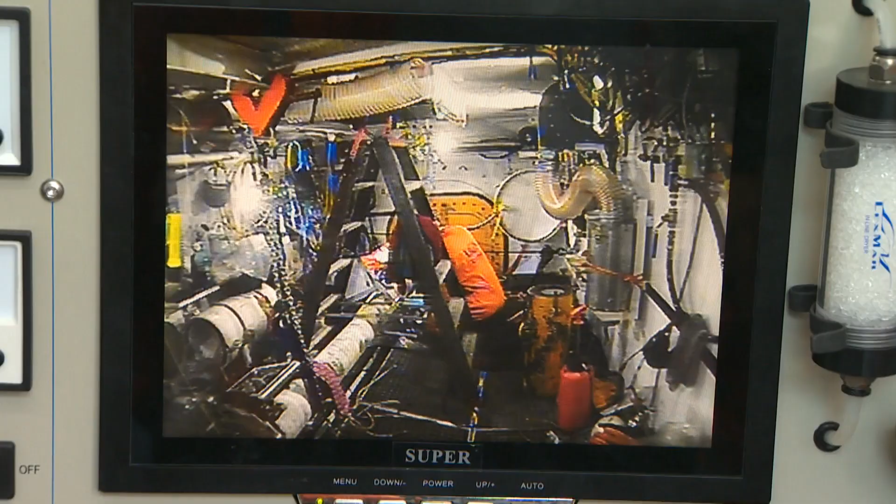It is important to identify solutions to answer particular challenges, as in offshore installations it is important to handle the troubles, and GSP Prince can handle heavy problems. Divers may be mobilised for subsea surveys, installation, decommissionings. They are an outstanding professional body. This time they perform a subsea welding operation. The outstanding well-trained divers team can go deep underwater and weld in such a manner they make us believe it is a normal thing in the world.

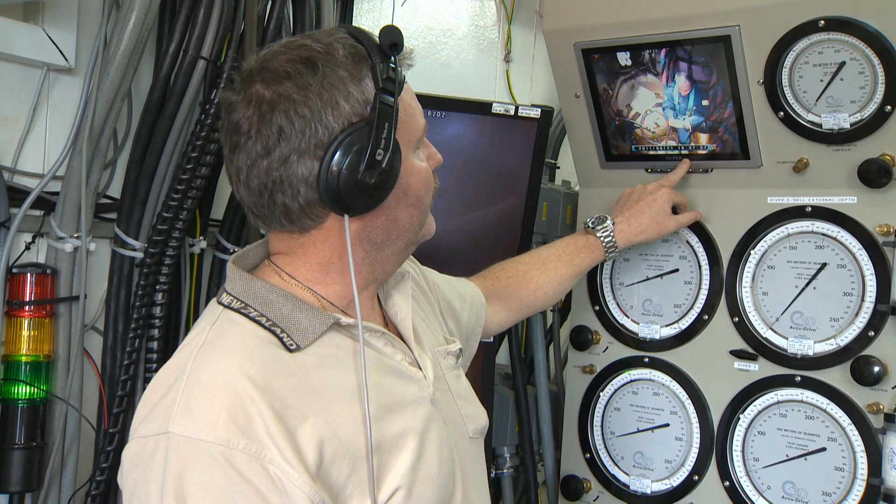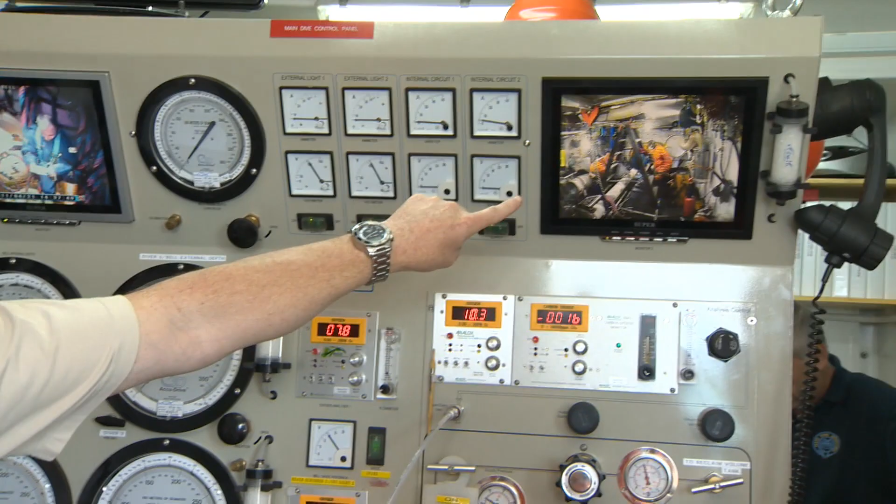First they have to stay in hyperbaric chambers. The length of the interval they actually live there depends on the diving depth they have to reach. Yes, they are a special breed. We have the diver here in the bell. He monitors the diver's gas. And the 2 divers, you can see their umbilicals are going out to the bottom, and they are now in the habitat. The habitat has been blown dry, and you can see the 6-inch pipeline here. And right now they are halfway through the first weld, the root pass on the first weld.

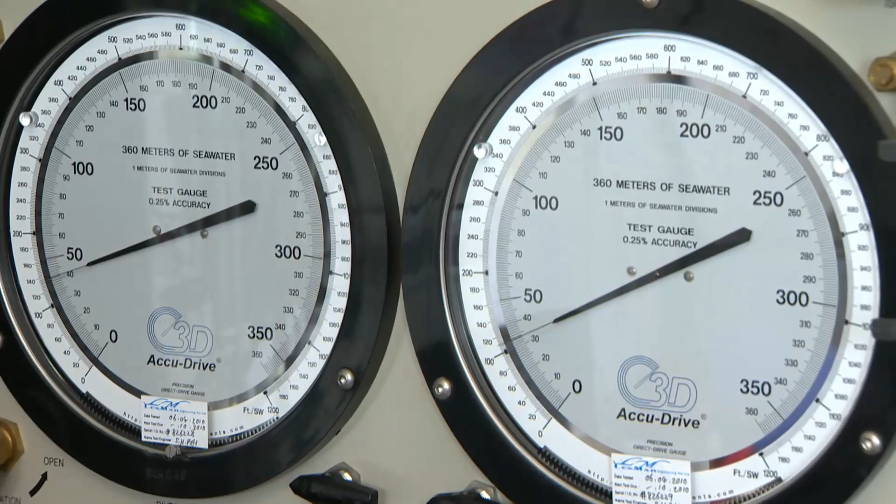Without leaving the pressurised tanks, they enter the diving bell and go deep to the bottom of the sea. Sometimes they reach hundreds of metres of salt water. This system is rated for operation in 300 metres of salt water. Everything is constantly monitored. The air inside, which is actually a gas which makes you speak like this. The sleeping hours, the food that enters through here, and of course their health.

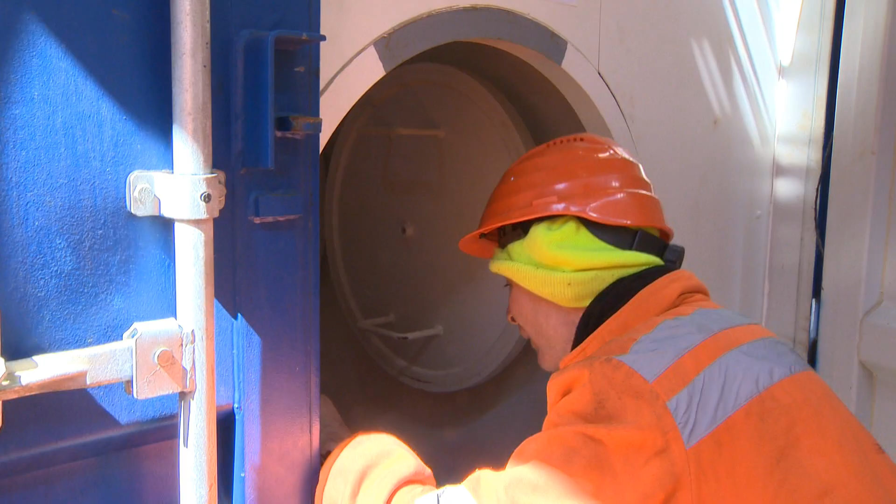Sure, GSP could choose an easy way. 2 welders sitting on the pipe and welding. But no, they went the last mile. The welding is done in a perfectly controlled environment, the hyperbaric subsea welding chamber. After completing the subsea survey with the ROV DSV GSP Prince, the place is ready for the next step, laying the pipe. But we've already been there.

So this is how things were done from GSP's perspective. But you cannot honestly say that things are done till the client says so. So let's see if the client is happy. Right now, the gas flow through the pipe is on standby. But in a matter of seconds, the entire system, pipe and gas control units, will start running. For this, the Gazprom Vice President and Russian Prime Minister are present.